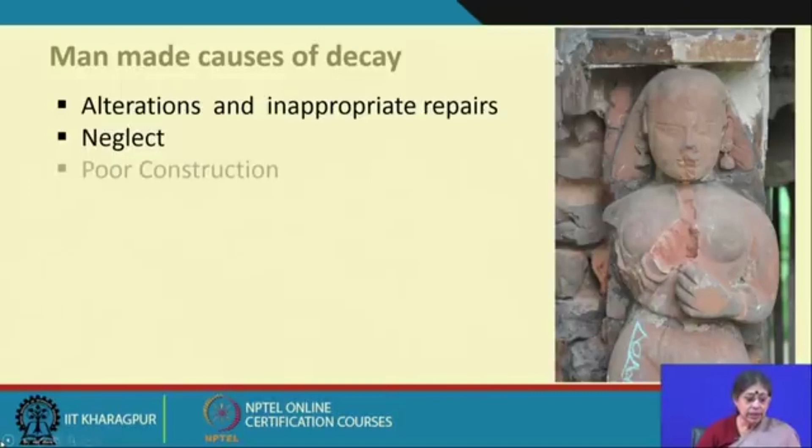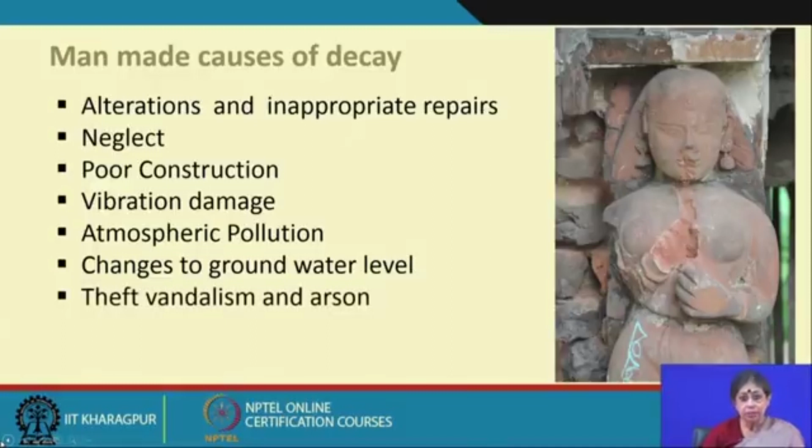Even if the intention is good, it may cause far reaching problems: neglect, poor construction, vibration damage, atmospheric pollution, changes to groundwater level, theft, vandalism and arson, wars and conflict, and tourism.

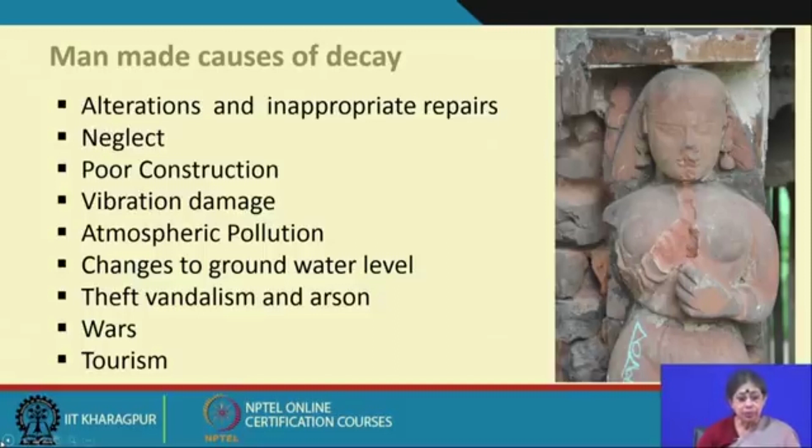We will take these one by one and briefly discuss with examples the man-made causes of decay. One of the very prevalent causes of damage to historic structures is the use of wrong mortar.

In most earlier structures, lime mortar has been used. When cement mortar is applied instead, cement is much stronger, and this causes the spalling of stone in a historic wall. So the mortar has remained safe, but it has really caused problems.

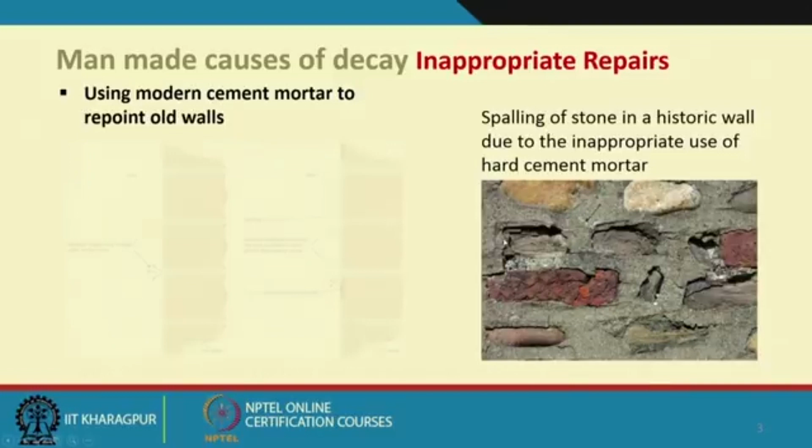Why does this happen? As you can see in this diagram, if there is lime mortar with brick or stone, which are porous building materials, the water would like to come out. We have discussed the penetration of water; it may be due to rain or rising dampness. It would like to come out through the pores, and generally it comes out through the joints, and if lime mortar is used, this is possible.

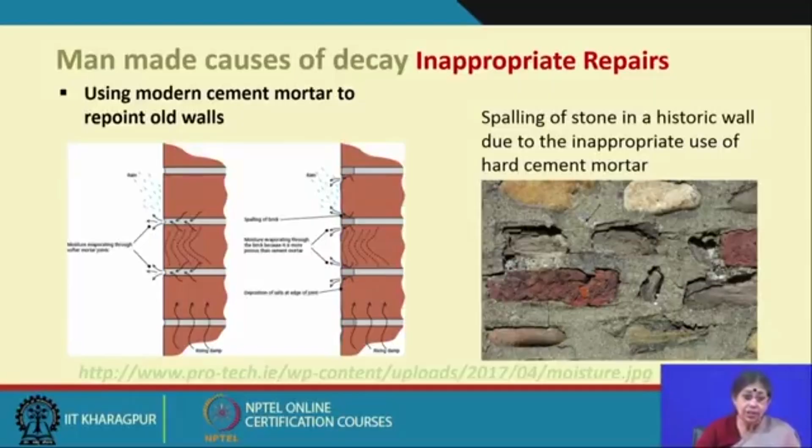In the case of cement mortar, it is much stronger and much more impervious, so the water cannot come out through that. It tries to come out through evaporation instead, through the bricks, and in that process it causes spalling of the bricks, while the mortar remains safe. So it is absolutely important to use a mortar of lesser strength than the building fabric. This is a very common damage which happens when using modern cement mortar to repoint old walls.

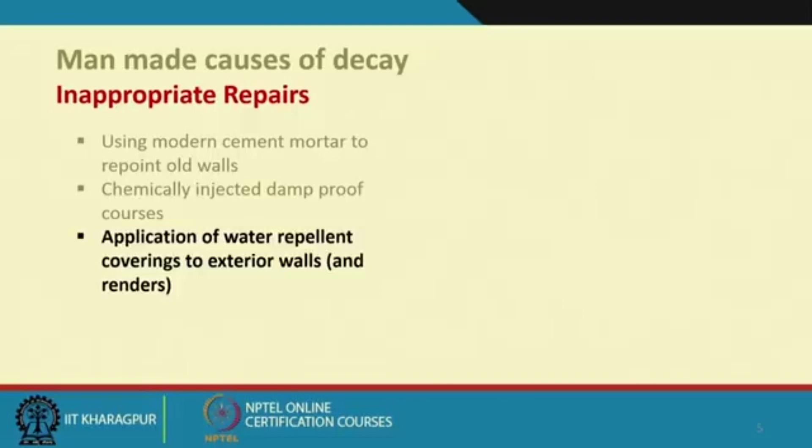Sometimes chemically injected damp proof courses, which are again of stronger or impervious material, can also cause a problem. Application of water repellent coverings is also an issue, because the building fabric of old historic walls needs to breathe, and if that is not possible, it causes further damage to the historic fabric. Sometimes modern emulsion paint is also used to cover walls, which causes further damage. I will talk about some examples here.

There is a beautiful structure in Medinipur, Moyna Garh Fort, a very historic structure protected by the West Bengal Heritage Commission. There are two sort of moats around the structure, and this beautiful temple here.

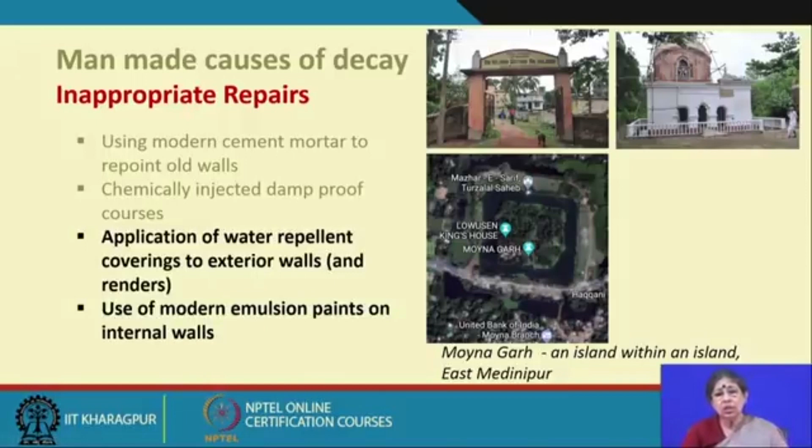Here it is not intentional, because the owners are very concerned about the historic structure and wanted to repair it. But because of the lack of knowledge of the craftsman or artisan who advised them, they used stronger material like emulsion paint to cover it, which eventually caused further damage to the historic fabric by covering it with an impervious layer.

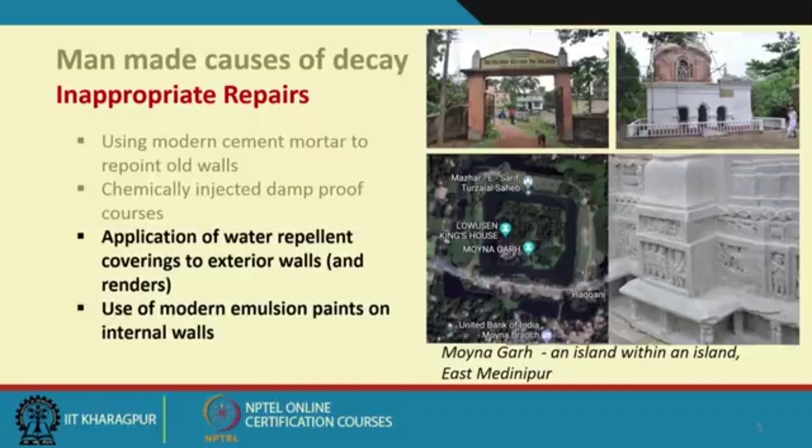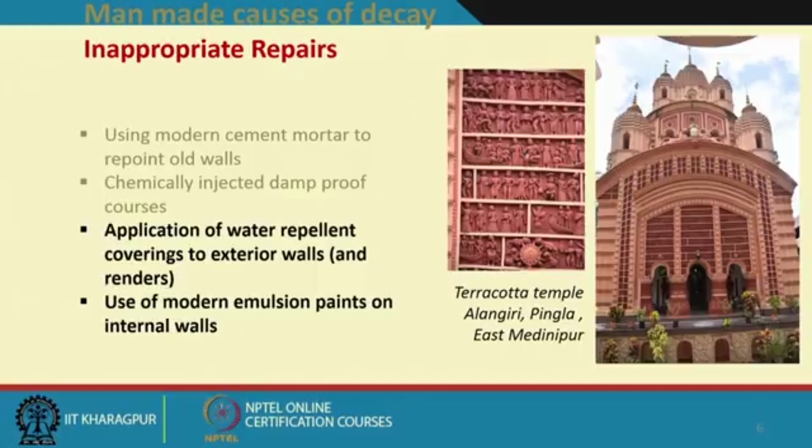This is another structure of a similar nature, again a beautiful structure owned as private property. They have the resources, and there are beautiful sculptures all over depicting our epics and other subjects. Because there was a problem and they wanted to repair it and keep it well preserved, they covered it and asked the help of craftsmen who were not aware of proper restoration techniques.

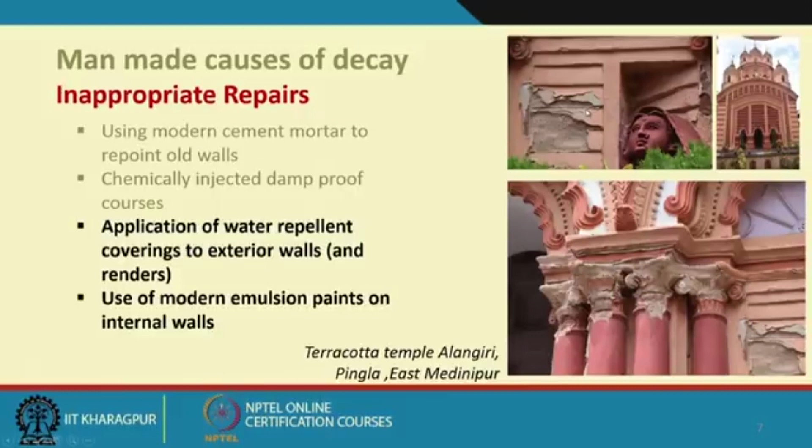So they used modern emulsion paint, and as you can see, this is falling off. A beautiful structure which may look good and colorful for a short time, well preserved, but in the long run will cause further damage. You can see it is falling off and also bringing out the original material. These types of repair methods are very dangerous for historic fabrics.

Neglect is another cause. This is a beautiful school building in Cooch Behar in northern Bengal, Jenkins School. As you can see, it is quite well preserved.

This is the front portion, and they paint it regularly, but due to neglect, as you can see in this portion there is not proper drainage happening on the flat roof, and eventually saplings are growing up, causing further damage to this structure, which is also in a very precarious state.

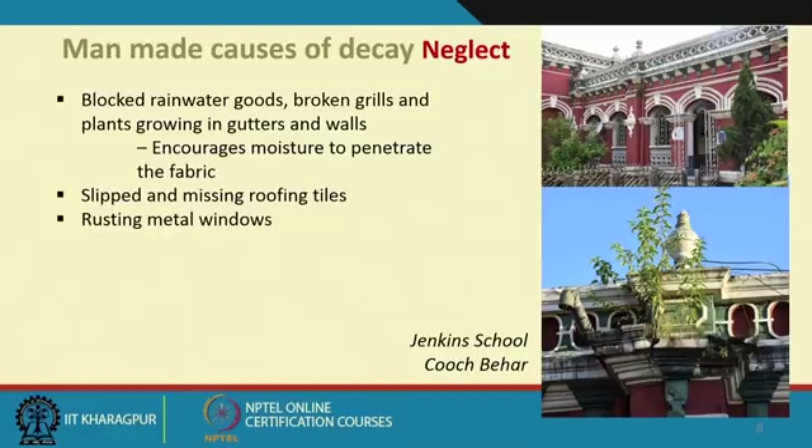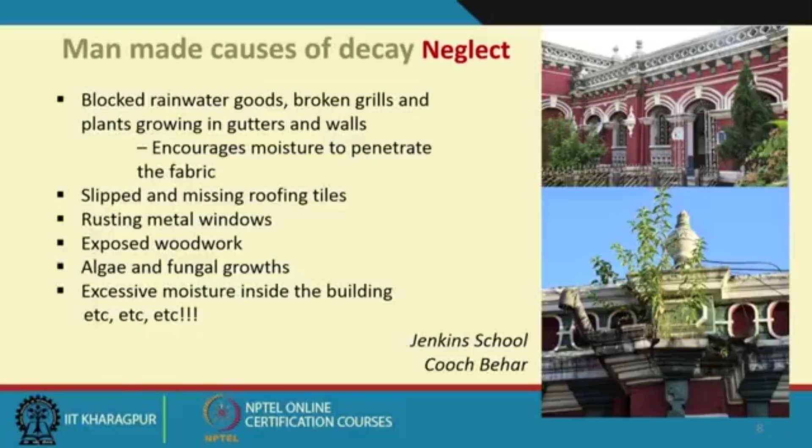This type of neglect happens due to very simple reasons which are easy to take care of, like blocked rainwater goods, broken grills, and plants growing in the gutters and walls. They encourage moisture to penetrate the fabric, or sometimes slipped roofing tiles, which are easy to repair, but due to neglect there's rusting of metal windows, exposed woodwork, algae and fungal growths, which we've discussed as natural causes of decay, and excessive moisture inside the building. These are all due to neglect, which can be taken care of very easily.

Just a regular maintenance policy is more than enough to take care of that. These man-made causes of decay, or neglect, are actually a very prevalent cause of damage to many of our historic structures.

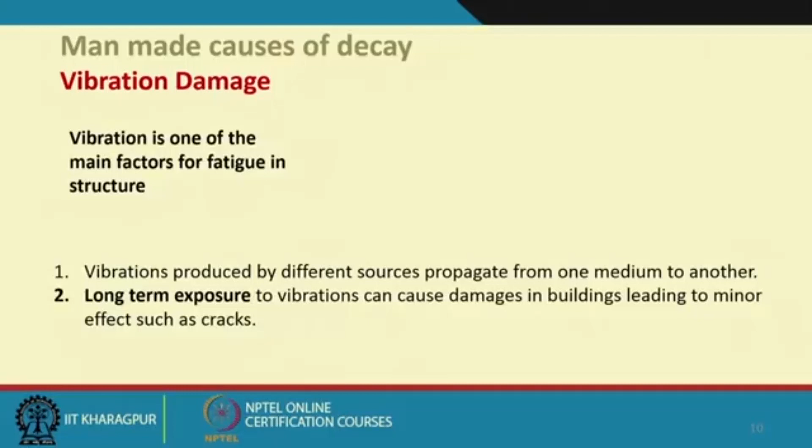Another is vibration damage. This vibration damage is one of the main factors for fatigue in structures. Even slow vibration produced by different sources propagates from one medium to another. It can be the continuous movement of cars, heavy traffic, or railway lines causing it. So long term exposure to that can cause damage and affect with cracks. There can be minor damage also in critical cases, which can result in collapse, especially in historic buildings.

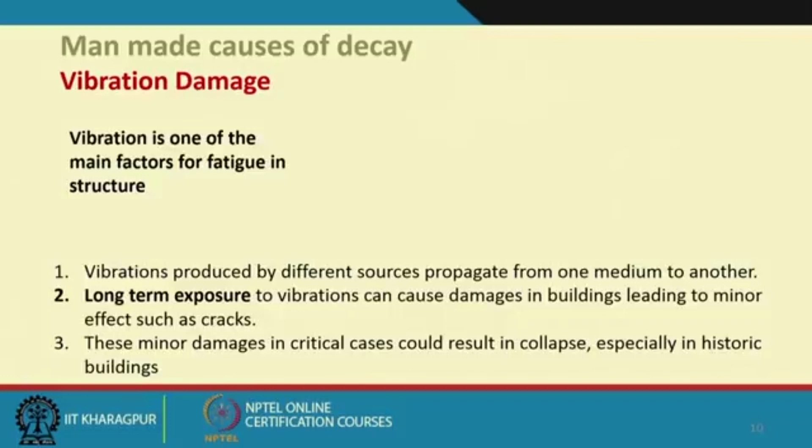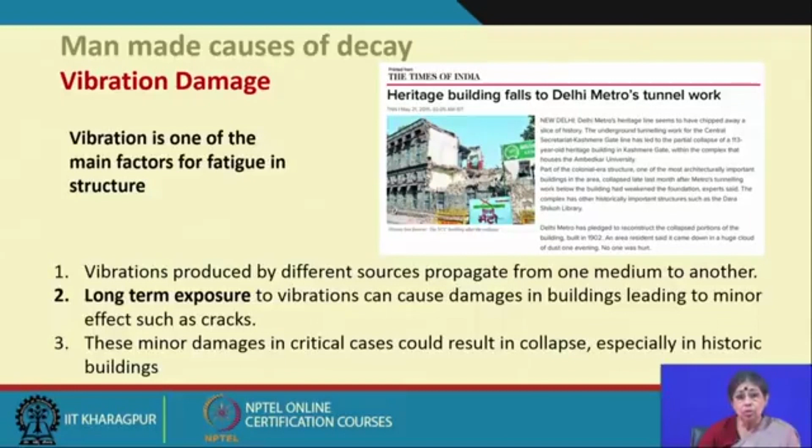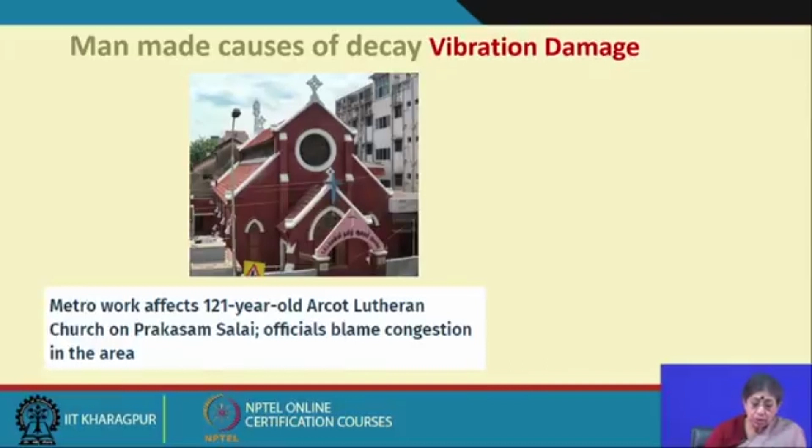The metro digging for metro corridors is very important and happening in most of our cities. This is the metro railway work in Chennai. It has affected a 121-year-old Lutheran church, and you can see how cracks have developed. Experts have been called, and they are trying to monitor the cracks.

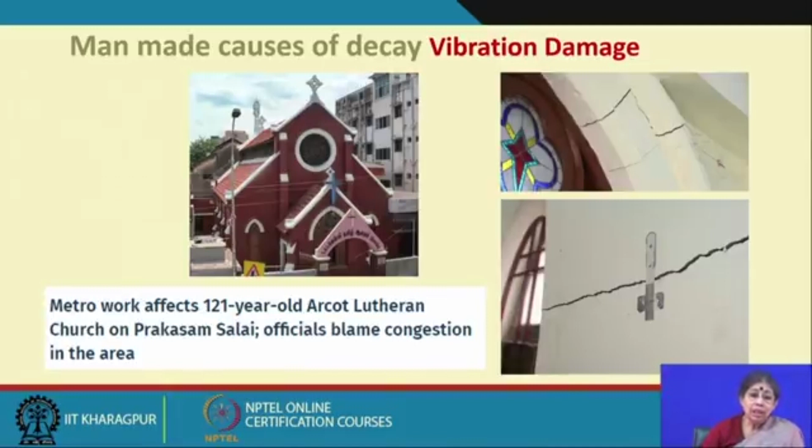These are problems where, if people are concerned beforehand, precautions can be taken, or in extreme cases, realigning the corridors is important. This is seen, for example, in Mumbai Metro also, where tunneling work near the heritage building is really causing issues, because they go very close to the heritage structures.

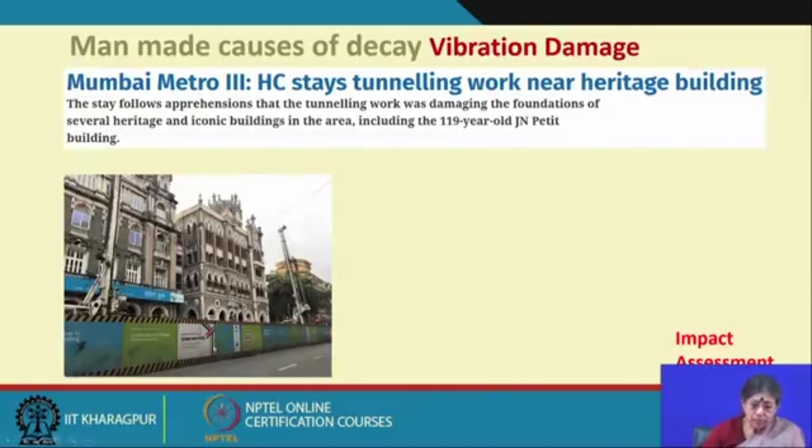So, what is important here is that we are not saying no development work can be done nearby. What is important is the impact assessment through proper expertise and precautions. We need to see the proper section, what is the foundation, and what type of precaution should or can be taken. So there must be a proper impact assessment to see where the tunneling is happening, where the foundation of the structure is, and what the likely impact of that digging is.

And again, not only during the initial construction, one has to remember that there will be regular vibration when the metro starts working, and that can cause further damage.

Proper precaution has to be taken, with regular monitoring. There are many cases all over the world where heritage buildings exist above where metro corridors or underground corridors are happening underneath the structure. It is possible, but one has to be very careful, proper expertise has to be sought, proper precaution has to be taken, and in extreme cases one can also rethink realigning the corridors, the highways, or the railway.

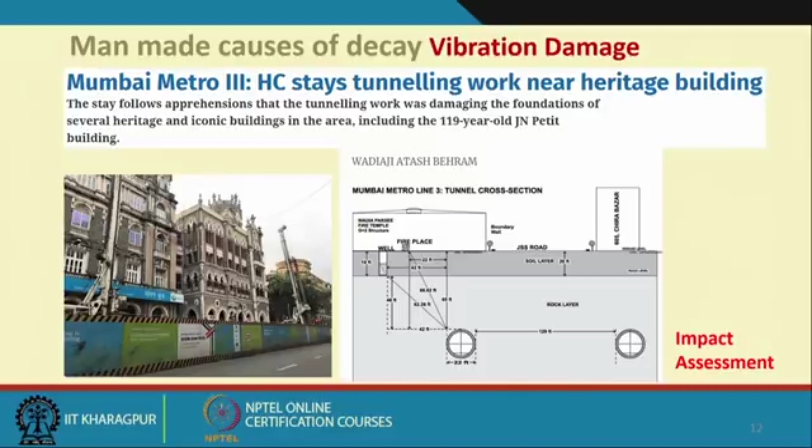One has to see what is the proper alternative solution, what is the balance, and what precautions one can take. Now, why does atmospheric pollution happen? What is this acid rain, which we must understand? Natural weathering will cause stone to deteriorate over many thousands of years, and brick over several hundred years.

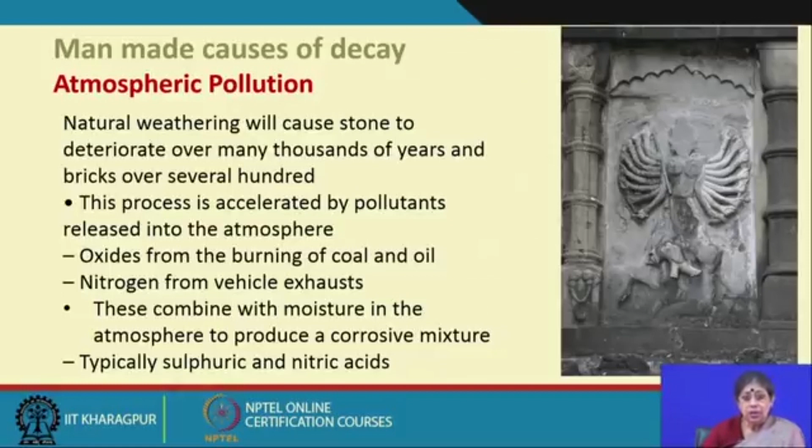Now, when these pollutants combine with moisture in the atmosphere, they produce a corrosive mixture, typically sulfuric and nitric acids, and when these come with the rain they cause acid rain, which when deposited on the surface of historic structures can cause problems. Now, one must understand that not all types of material are affected similarly by acid rain—it depends on which type of material.

One of the very well known cases is the Taj Mahal, about which all of us are very concerned, because of the yellowing of the Taj Mahal due to acid rain, where the marble is getting affected. A recent Indo-US study found that dust and carbon-containing particles are settling on the Taj Mahal and causing discoloration, and a massive restoration was going on to remove that discoloration. Because it is a World Heritage Site, more stringent measures were taken in the case of the Taj Mahal.

It's known now that the Mathura refinery and many other industrial developments happening within close vicinity of the Taj Mahal are causing further damage. Severe mitigation measures can be taken—in this case, it was stopped for some time, along with increasing the height of the chimney and treating the pollutant at the source. These are some measures which can be taken, but one must know the causes of this deterioration and how to mitigate it.